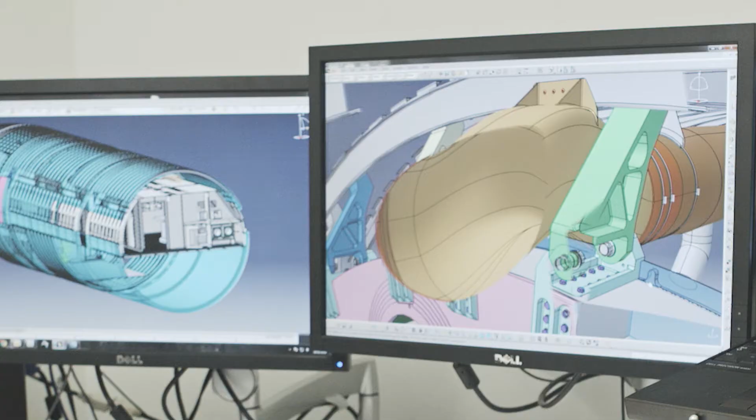Fused deposition modeling is sort of a new concept for us in the design world. Traditionally, you design components to be an assembly, comprising several different parts. But using fused deposition modeling allows you to go straight for the finished part and integrate all the different features that you would normally have as subcomponents into one monolithic structure.

So we approached the Service Bureau to have a part design that would fit in this very complex area where we had to get the airflow over a rigid barrier, and it had to maintain the volume as it was going over the barrier. So the shape had to be very complex, and this product had to be made using a manufacturing technique that was not normally used for aircraft components.

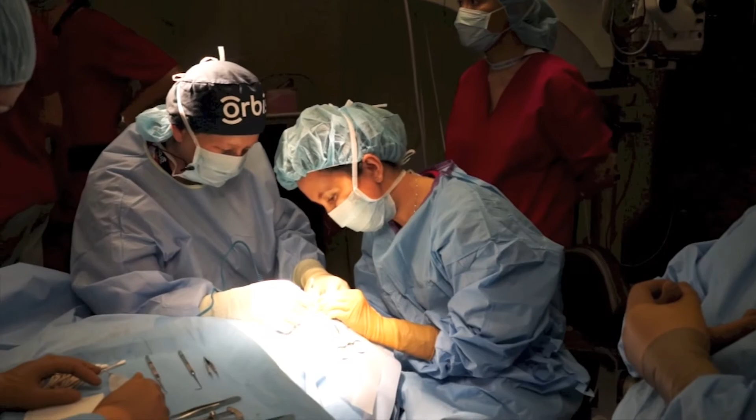We're very excited to be a part of the Orbis project. It's a remarkable charity that uses an airplane, an MD10-30, to fly around the world. It lands, it has a screening process for candidates for eye surgery. They'll take viable candidates on the plane and perform an eye surgery on board. The actual eye surgery is televised to the front classroom area where local surgeons, nurses, and anesthesiologists learn how to perform surgeries.

I'm sitting here in the staging area for a large engineering program that will convert this aircraft into a flying eye hospital that will go around the world and help restore sight.

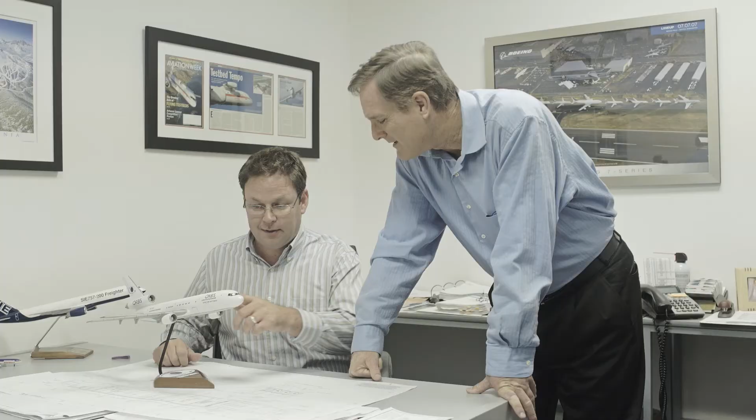We're going to enter a modular hospital. They're basically big boxes that when they line up in here, they form a new interior, but it is a replaceable interior. So if in 10 years Orbis needs to reconfigure with the latest technology, they roll this one out and they roll the new one back in without interruption of service.

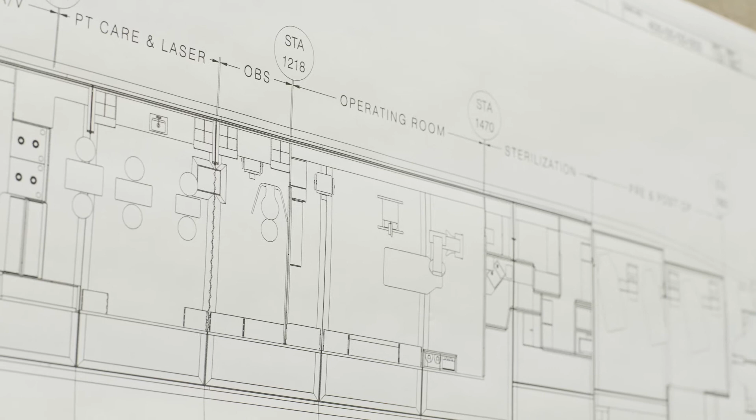Part of the process of that is a 9G barrier that protects the flight crew and surgeons from all the palletized hospital modules in the back.

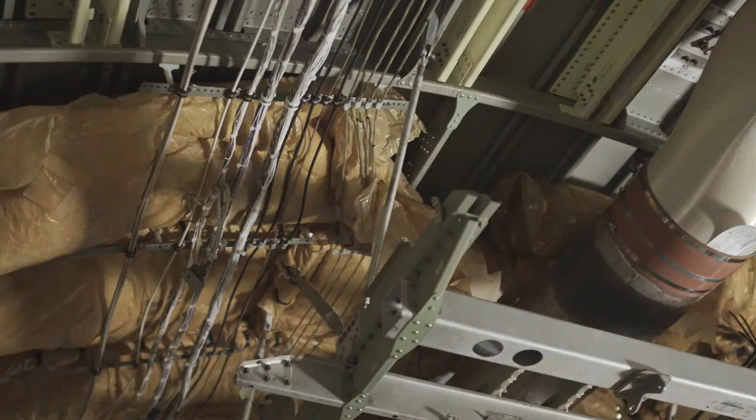Being able to integrate a number of different mounting features as well as the primary part really changes the way now that we're thinking about designing parts, and being able to integrate more features into a single part instead of having a number of different components.

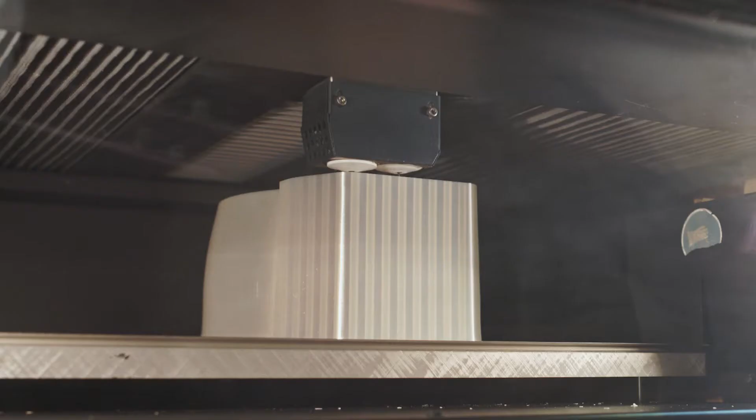Our designer designed it and then the 3D printer beautifully reproduced it. But it was not just beautiful, they also provided us with laser measurement data to great precision so we really knew we had what we asked for. And it fit beautifully. I think it was the first or one of the first parts on site. So that had been just a really great cooperation that we had.

SIE was able to work with the Service Bureau and create this beautiful design that is not only visually pleasing, but functionally works perfectly for the situation. And this was a great collaboration that allowed this project, Flying Eye Hospital for Orbis, an amazing humanitarian project, to go forward and be completed.

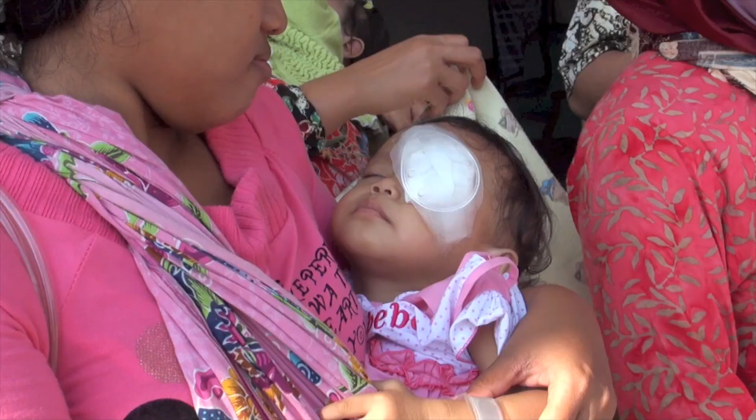And seeing them screen little kids for eye surgery and the way that it changed those little kids' lives after being able to see for the first time, I'm very proud to be a part of being able to change people's lives through my job as an engineer.